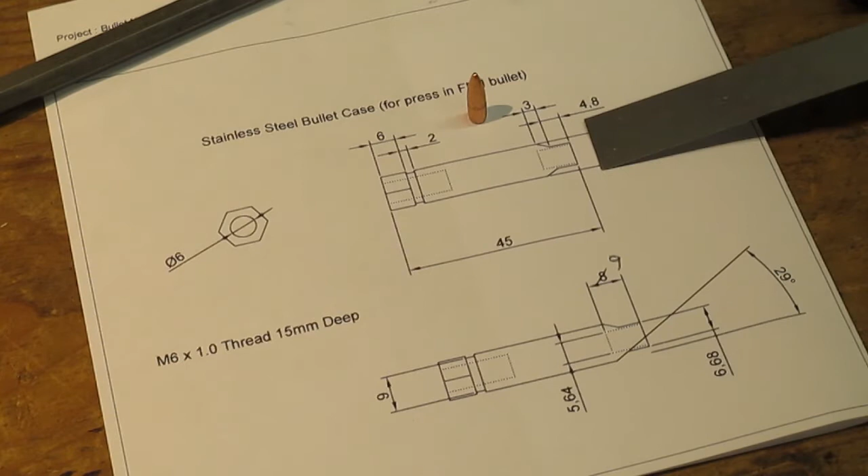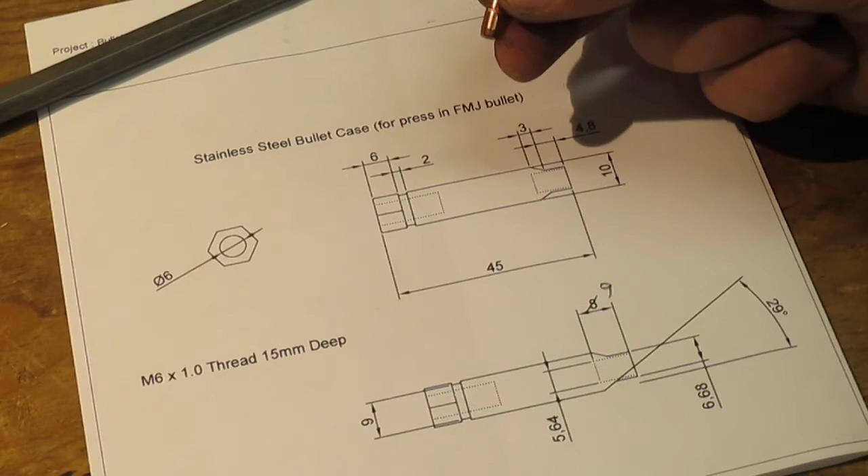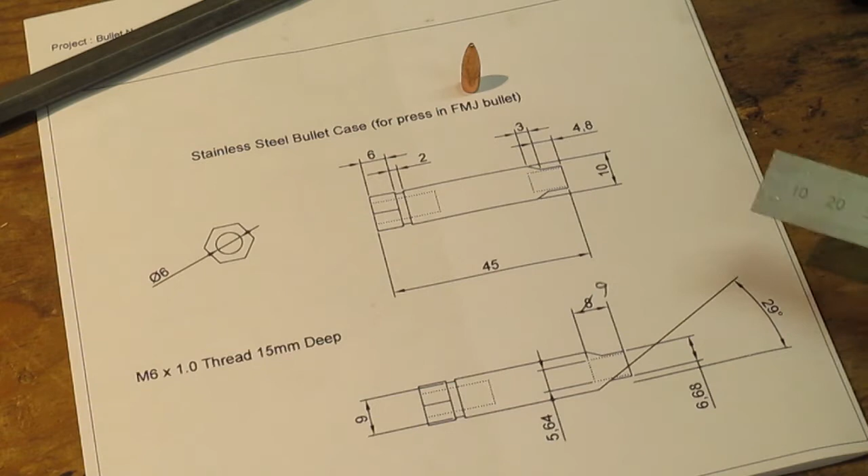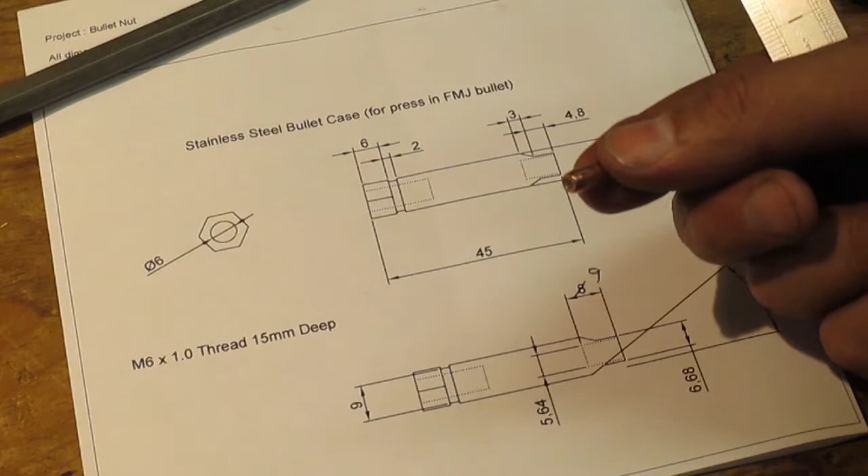What we're going to make is basically a bullet case, a stainless steel bullet case. I bought some 304 stainless steel hex stock recently for this project. We've got an overall length of approximately 45mm for the case, and I've got some Full Metal Jacket bullet heads - these are 5.56 or 223 bullet heads that I don't actually use. I've got about 20 odd of these just hanging about, so I thought I'd use them for the project. We've got a hex part left on, 6mm deep, then a 15mm deep thread, that'll be an M6x1. Essentially we've got a bullet shaped case with a 9mm deep hole that is 5.64mm, about 0.03 millimeters smaller than the actual bullet head itself, so that should press fit in there really well.

So I'll get this mounted in the lathe and get it faced one end, and then we'll go from there.

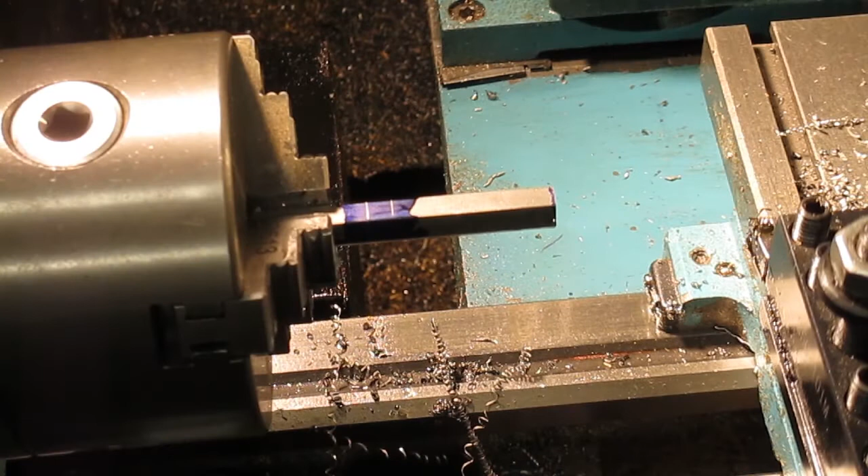Okay, so we've got the hex stock in the 3-jaw chuck. We've faced the ends, and I've got a 39mm mark and a 45mm mark, and that will be our hex nut essentially. So we're going to round this bit off, then we'll drill it to depth, and then we'll put the chamfer on, and then we'll part it off. So let's get going.

Okay, well all of the cases have now been machined. We've got the collet chuck back on, and what I've done, I've already done one. I've set up a carriage stop so that we can face these all down to the same distance. Once they've been faced, we'll get a centre drill in there, drill them out, 5mm chamfer, and then tap for M6 by 1 - we'll power tap. Once we've done all those, we'll bring them all back just to chamfer the threads and chamfer the nut itself. I don't want to do that just yet because I want to keep the compound and cross slide set where it is. So let's crack on.

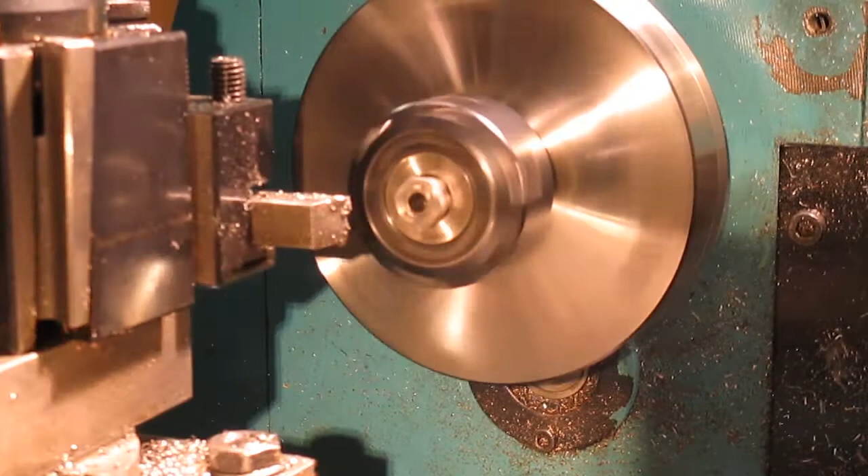And that's it, so I've got the rest of those to do. All I've been doing after this stage is running a bottoming tap, a brand new M6 bottoming tap through there, although the spiral tap does go all the way down. It's quite an old one, so I just want to make sure we've got full thread depth on those. I'll do that off camera, then bring you back at the next stage, which will be pressing in the bullet heads.

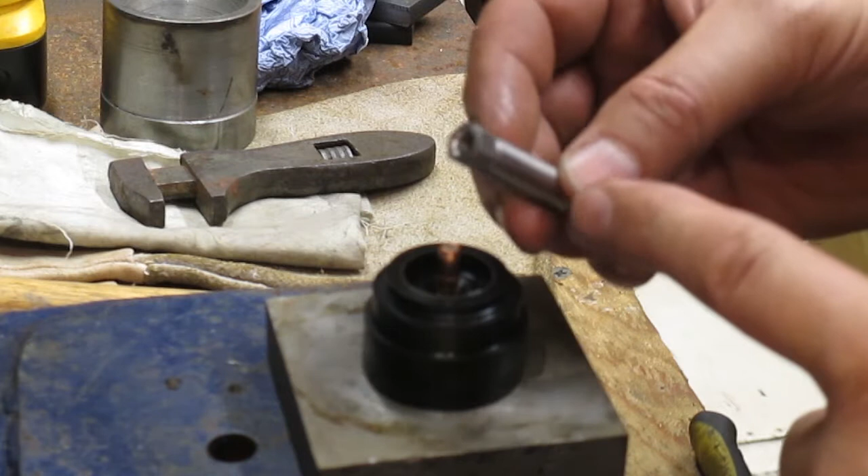Okay, so we've finished bringing these to size and tapping them. I've run a brand new bottoming tap through all of these so they're nice and full depth threads, chamfered the end, and put a chamfer on the threads themselves. So what's left to do is literally push these down. On a full metal jacket bullet head, there's a little crimp line that's used when normally making them, so I'm just going to use that to gauge when to stop crimping, so I can do this and keep you in the shot.

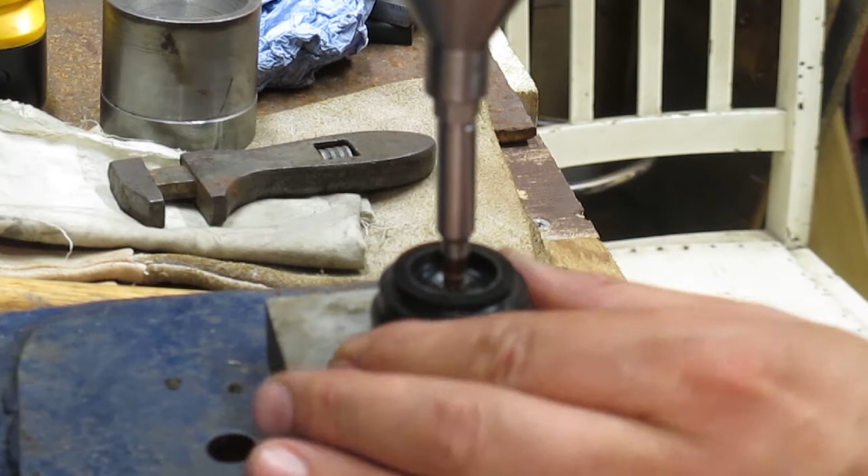It's not going to take a lot of pressure to get these on. And there we have one crimped bullet. As I say, I've already done one, so this is my second one, so I've got another 14 to go, and then they're good to be sent out. I'll get these done and bring you back when I'm finished.

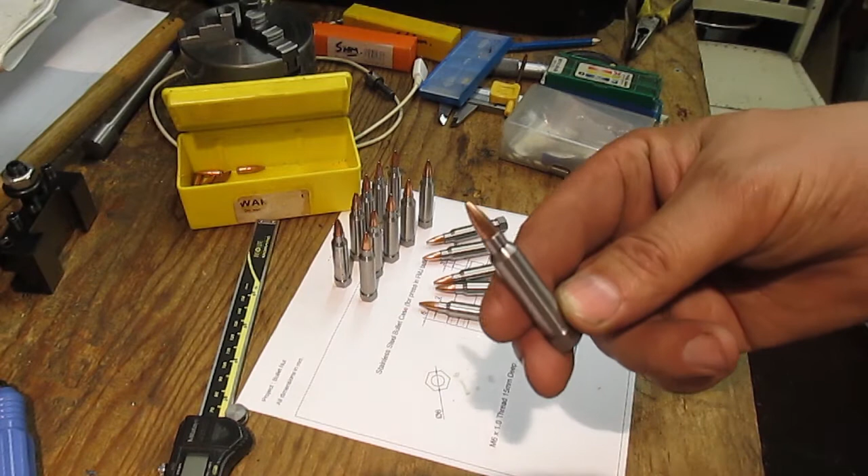Well, there we are, all done. I can get you in a bit closer on one of these - essentially it's a 5.56 or 0.223 inch full metal jacket bullet tip with a stainless steel case, and a 15mm M6x1 hex nut. So they are just nuts really. This is for a custom motorcycle that the guy's making, for a World War II or World War I themed bike I believe, and a fantastic little project to do.

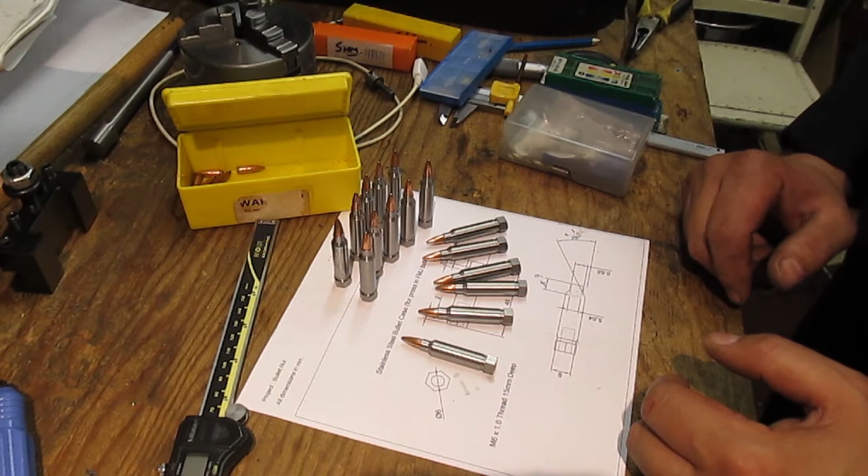So yeah, they're done. All that's left for me to do now is get these wrapped up, obviously individually, so they don't get damaged in the post. Get them all wrapped up and then send them off most probably tomorrow now.

So all good. Well, that's the end of this little episode. Fantastic little project, just taking me a couple of days to get this done, but really great project to do and to produce for someone for a custom motorcycle.